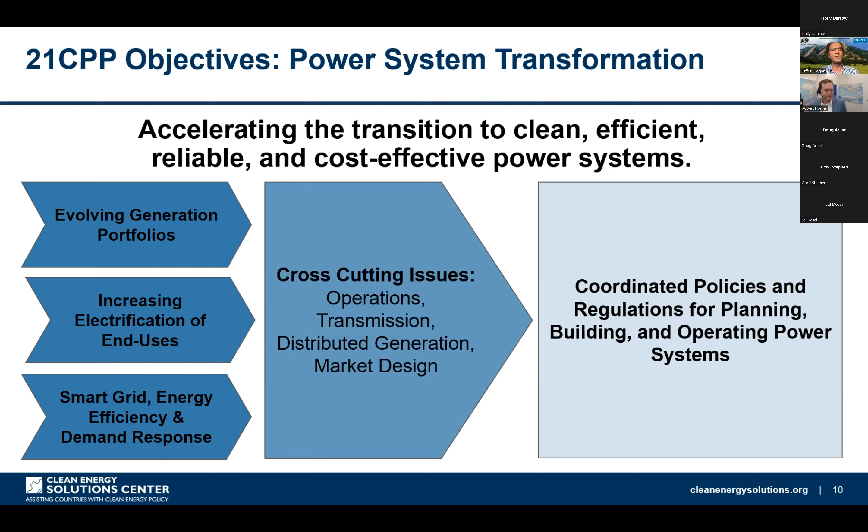So if I could have the next slide, please. Our annual program of work focuses on what we call thought leadership studies and providing technical assistance, either on a bilateral or sometimes regional basis to other countries to help them focus on the specific challenges they're facing as they transition their power sectors.

And we also provide information exchange, capacity building, and on occasion fellowship programs where people can help to build capacity in their technical capabilities. And the next slide.

And the next slide, we're going to take a quick look at a short video, which is now quite old, I could say. It is a video that shows the results of a grid integration study that the 21st Century Power Partnership and many other organizations produced back in, I think it was 2017.

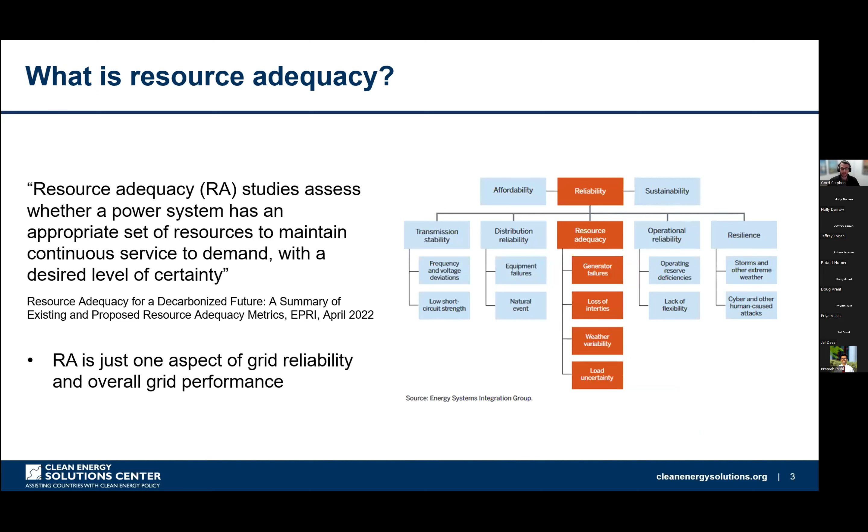As a starting point, it's probably best to lay the groundwork, make sure we're all on the same page in terms of what is actually resource adequacy. What do we mean when we're saying that, and how does that relate to other aspects of power system performance that we care about?

There's lots of different things that you would want out of a power system in terms of designing one, in a future power system that meets different expectations of society. As Jeff alluded to earlier, obviously we want it to be affordable. We want it to be sustainable and in line with decarbonization goals. And we also want it to be reliable.

Within the umbrella of reliability, we have a number of different aspects of power system reliability, and I would argue that resource adequacy is the most foundational of all of those aspects. Resource adequacy, I think this is a good quote from an EPRI report, the way they describe it, is assessing whether a power system has an appropriate set of resources to maintain continuous service to demand with a desired level of certainty.

So it's really about the fundamental supply-demand balance on the power system. Do you have enough electricity available, and are you able to move it to the right places to serve demand everywhere all the time? Of course, we know that's not physically possible to have 100% certainty that you can always serve load everywhere, because there's always going to be events happening that could compromise that capability. But we want to assure that we can do that with a sufficiently high level of confidence, or in other words, there's a sufficiently low level of risk of having some kind of shortfall event.

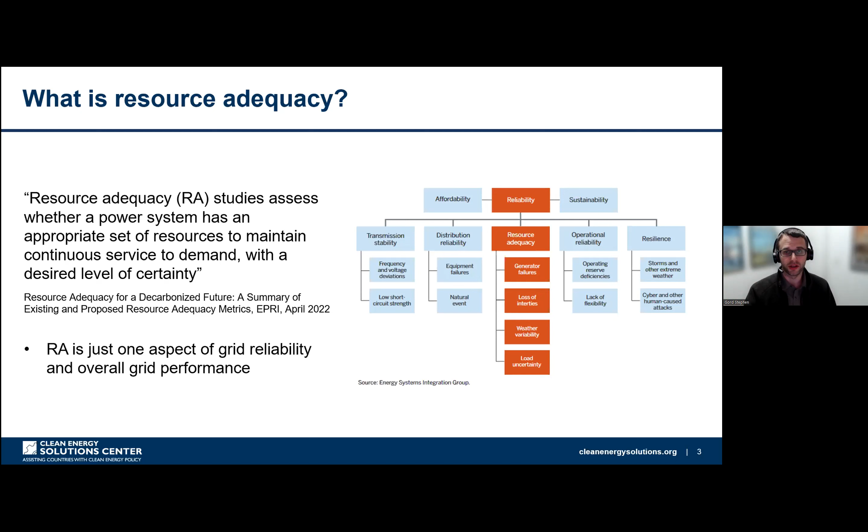So then the next logical question might be, do we need to change how we think about resource adequacy? This is a topic that we've been studying as long as there have been power systems. But under the transition that we're experiencing now in power systems around the world, there really are some things that change some of the underlying assumptions that go into trying to assess whether or not a particular system would be considered resource adequate or not.

Especially historically, this type of analysis has really been focused on risks arising from thermal generating plants. If you have a coal plant, there's some probability that at any given point in time, there's some mechanical issue or failure that happens with that plant that forces the generating unit to be taken offline for repair. While that unit's offline, obviously it's not able to produce electricity and contribute to that supply-demand balance we talked about previously. If you get unlucky enough and enough of these random failures happen all at the same time, you can end up in a situation where your ability to balance supply with demand is compromised because of a lack of supply.

Traditional resource adequacy analysis has really focused on trying to quantify the probability that you end up in that kind of unlucky situation where you have a bunch of these independent failures all occurring at the same time. But in decarbonizing power systems, what we're seeing more and more is the risk of a supply shortfall moving away from that kind of thermal generation driven risk and towards weather driven risk.

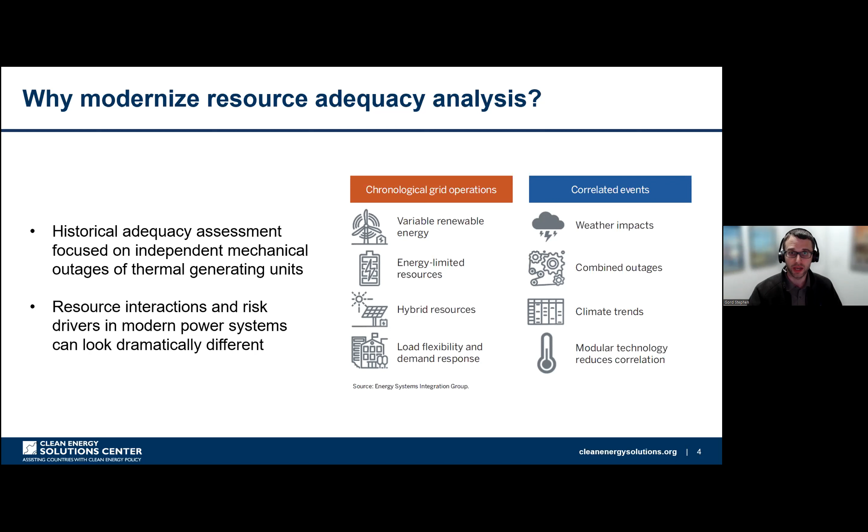Because of all of these considerations, which are in some cases totally different from the historical way that we've thought about resource adequacy and assessed it, that resource adequacy task force that I mentioned earlier proposed 6 fundamental principles of resource adequacy analysis that address these emerging issues. I'm only going to speak to 4 of them today, for the sake of time, but I'm happy to talk through all 6 or take questions on all 6 during the Q&A session. I'm going to talk through these 4 principles in the next 10 minutes or so.

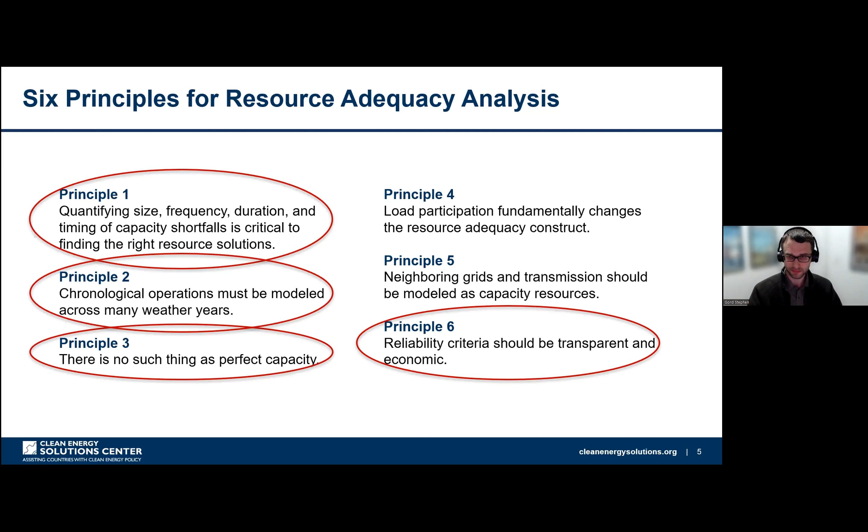I'm going to start with principle 6, which is actually the last principle, but in some ways I think it's the most foundational of them when it comes to deciding how we want to design a system. That's the question of choosing our resource adequacy criteria, basically deciding how much resource adequacy we actually want from our power system. Like I mentioned earlier, we can't get to 100%.

That's not technically possible. But we can, depending on our preferences, spend a lot of money to get really close to 100%, or not. And that choice really comes down to a balance between the benefits and the costs of that additional reliability. In a lot of places, historically, we've kind of thought about resource adequacy criteria as this fixed engineering principle that we need to achieve.

And the point we wanted to make with including this principle in the report is that resource adequacy criteria shouldn't exist in a vacuum. It's all about policy and economic trade-offs between the benefits to society that are delivered by having increased resource adequacy and the costs that society would have to incur in order to achieve those benefits.

So as you develop, or as you choose a resource adequacy standard, and you do these probabilistic studies and quantify the probability of having a shortfall, as you increase the stringent nature of that criteria and expect a more and more reliable system, it's important to keep in mind that that comes with an implicit cost of doing that, and an implicit valuation of what the opportunity cost to society is of failing to supply all that load.

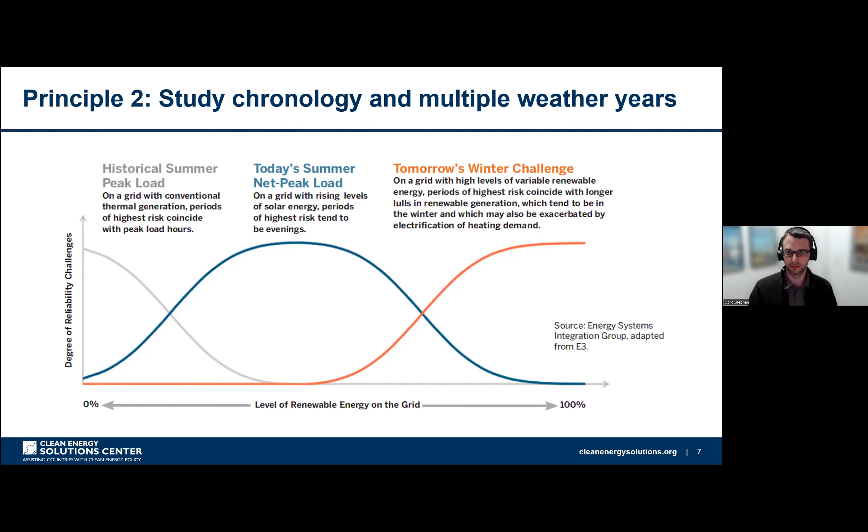The next principle, going not in numerical order here, has to do with identifying the specific risk characteristics your system faces. That can be in terms of the frequency of events, the duration of events, the magnitude of events—how much shortfall you encounter in a resource adequacy deficit—as well as the timing of those events, meaning when in terms of time of year and time of day they happen.

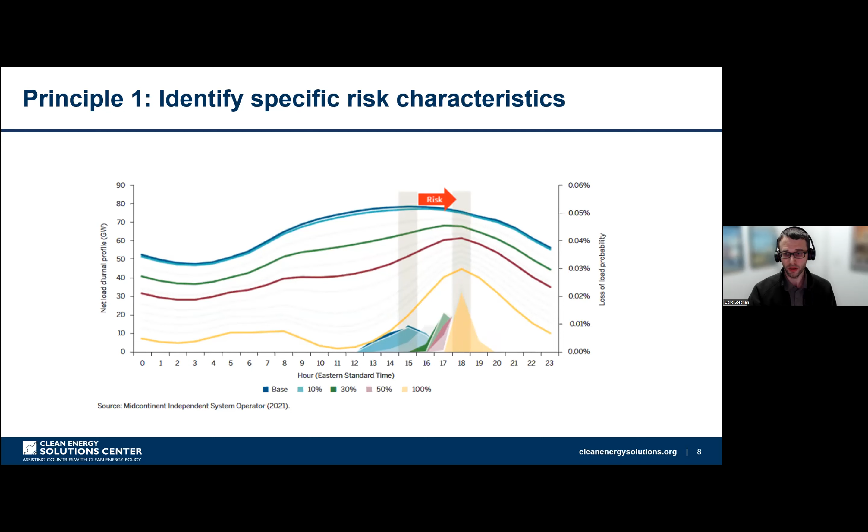And finally, I'll briefly touch on principle 3, which has to do with the fact that there is no such thing as perfect capacity. So I mentioned historically, oftentimes we would think of thermal peaking plants as the solution for improving resource adequacy. These are relatively low capital costs. They may have higher operating costs, but because we're only using them for short periods of time when we have these deficit conditions, that kind of economically made sense.

But even these resources aren't immune to unavailability issues. And in particular, what we've come to understand more clearly in the past few years is that there are lots of other kinds of risk associated with those types of units that we need to account for when we're deciding how resource adequate we want our system to be and which resource mix is required to get there. So in particular here in the US, there have been plenty of examples of situations where times of highest system stress have also aligned with times of low availability from resources that we've historically thought of as always being there and super dependable.

So things like cold waves that drive increased outages in the thermal generation fleet are kind of classical examples we've come to understand as situations where even these so-called firm resources, like a combustion turbine, they're not perfect. There's some increased risk that they're not available during times of need, and we need to make sure we're capturing that in our resource adequacy assessment and in our investment plans when deciding where the appropriate resources are to design an overall resource adequate system.

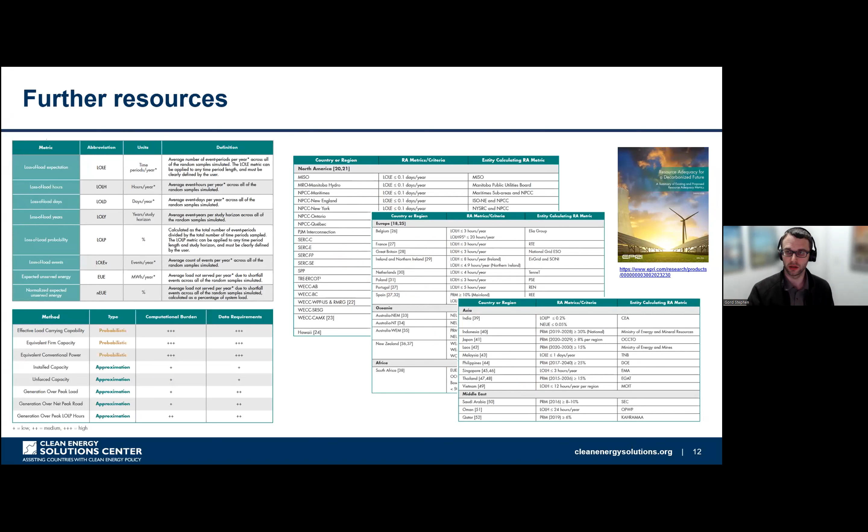And links to all of those reports and documents are included in the presentation. Thank you. So I will wrap up there and hand it over to the next speaker.

Holly, we have a couple of specific questions for Gord now. Should we do them now or should we hold them to the end? We can hold them to the end. All right, Priyam please, the floor is yours.

Yeah, thank you. Can someone confirm whether my screen is visible and whether I am audible? Yeah, looks good. Okay, thank you. Yeah, hi everyone.

I am Priyam Jain. I am currently working as Manager System Studies at National Load Dispatch Center of Grid Controller of India Limited. Today I will be covering the role of flexibilization of conventional power plants to facilitate large-scale renewable integration, and I will be taking the example of the Indian power system for the same.

Today's presentation would cover the following in sequence. First, I will be covering the overview of the Indian power system, including the current generation and capacity mix, and the future roadmap for renewable integration or the clean energy transition in the Indian power system.

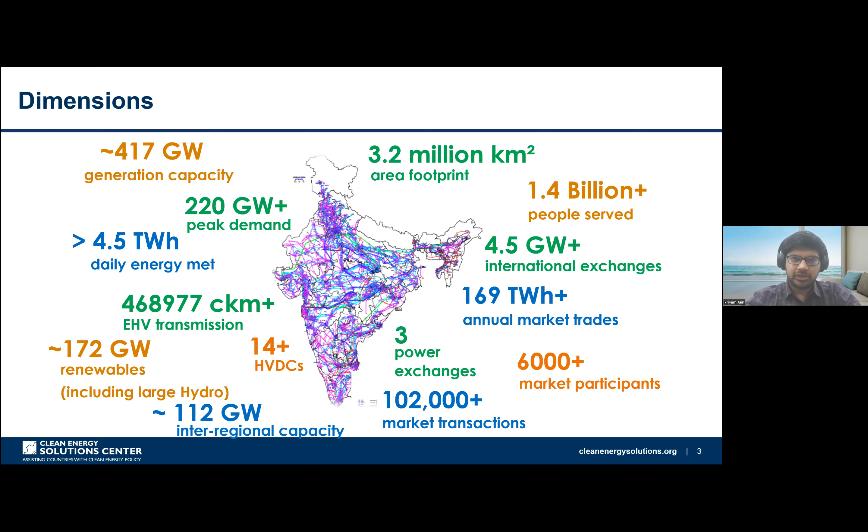So the clean energy transition in India has already started, and the same is also getting reflected in the annual and daily VRE penetration, as well as in the maximum VRE penetration. We can see that the annual wind and solar penetration in energy terms has already touched around 11% in the last financial year, whereas the maximum VRE penetration in daily terms is almost double that, at around 21%, while the maximum instantaneous VRE penetration has been recorded as 32% so far.

And some of the RE-rich states, such as Karnataka, have already touched a maximum instantaneous VRE penetration of more than 100%, which implies that they have met all of the demand through renewable generation sources only.

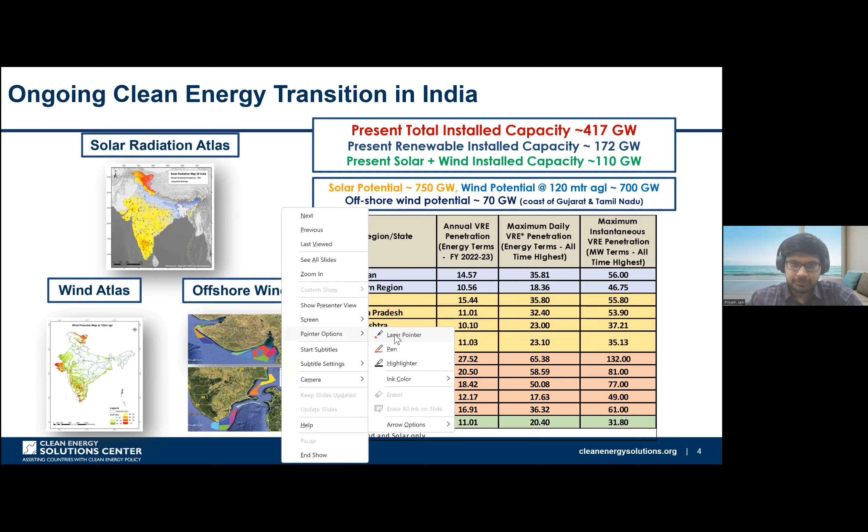The clean energy transition roadmap in the Indian power system has already been notified by the government of India. As per the roadmap, India will integrate 500 gigawatts of renewable, non-fossil capacity by 2030. Most of that will come from solar and wind generation sources, with both combined contributing around 400 gigawatts. Accordingly, the mix of solar and wind generation in 2030 would be around 51%, and these two will be the major sources of the total capacity mix, replacing coal as the most dominant source at present.

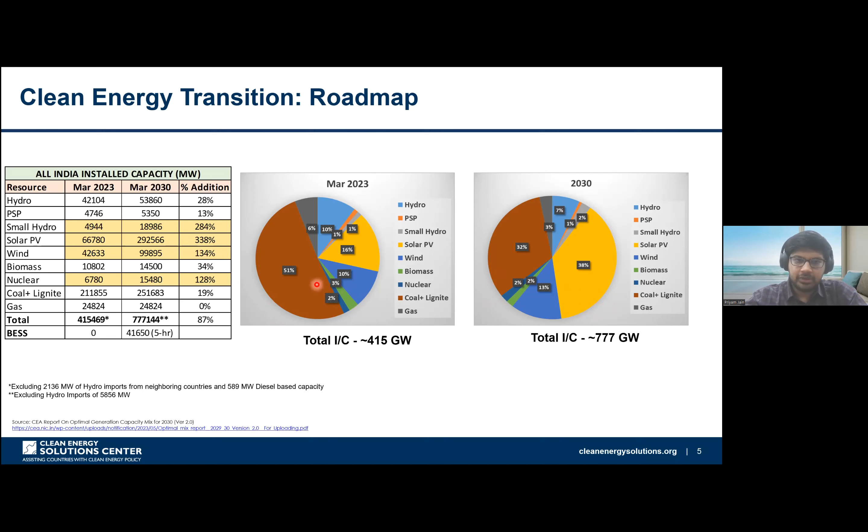In order to facilitate this large scale of renewable generation in the near future, there is a requirement for additional flexible resources in the system. But renewables are not the only reason for this increased demand for flexibility. There has also been an increasing trend in variability on the demand side.

Here we can see the demand trend for the month of February, which is usually the winter period in India. We can see the steep ramp in morning demand during the morning demand hours, and the typical ramp rate is of the order of 250 megawatts per minute, with the same increasing to around 500 megawatts per minute on some special days.

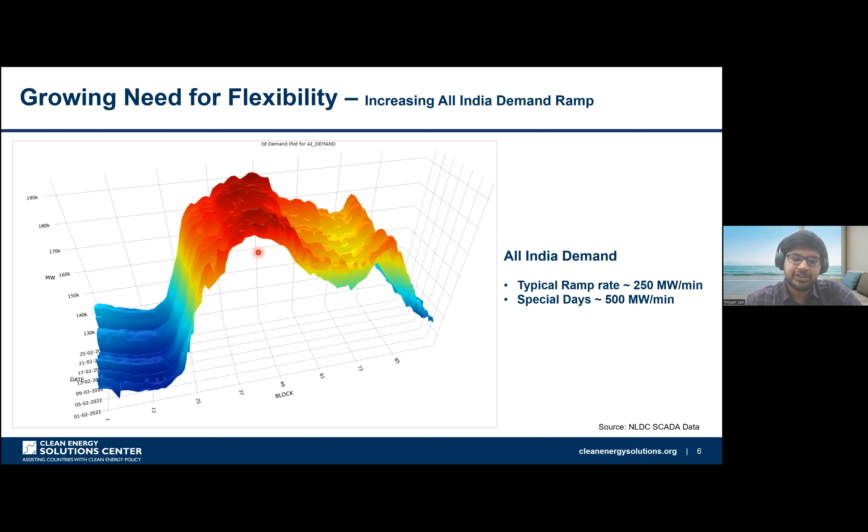The main reason for this increasing variability on the demand side is not only the integration of renewables, but also the disproportionate increase in minimum and maximum demand. Here we can see that the difference between maximum and minimum demand during the last 10 years has increased significantly, and now we see daily load variations of the order of 70 gigawatts.

This has increased the requirement of flexibility on the generation side also, which has been met through additional flexing of the thermal fleet and the hydro generation.

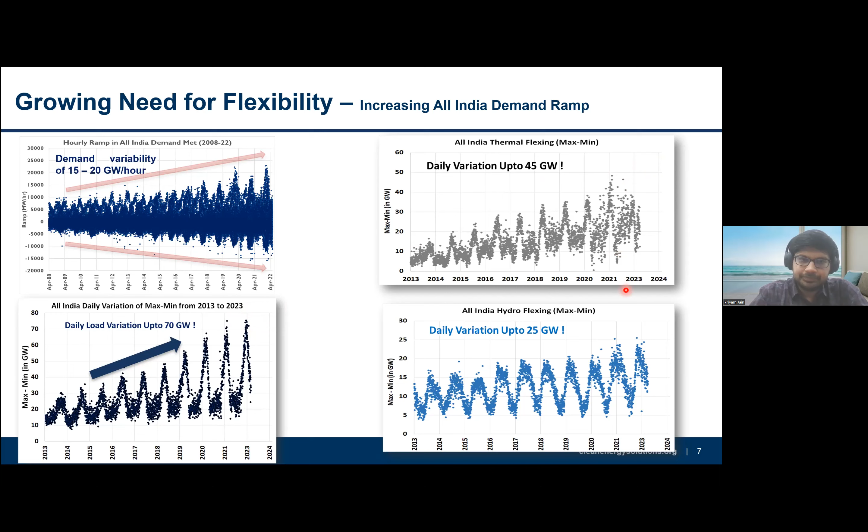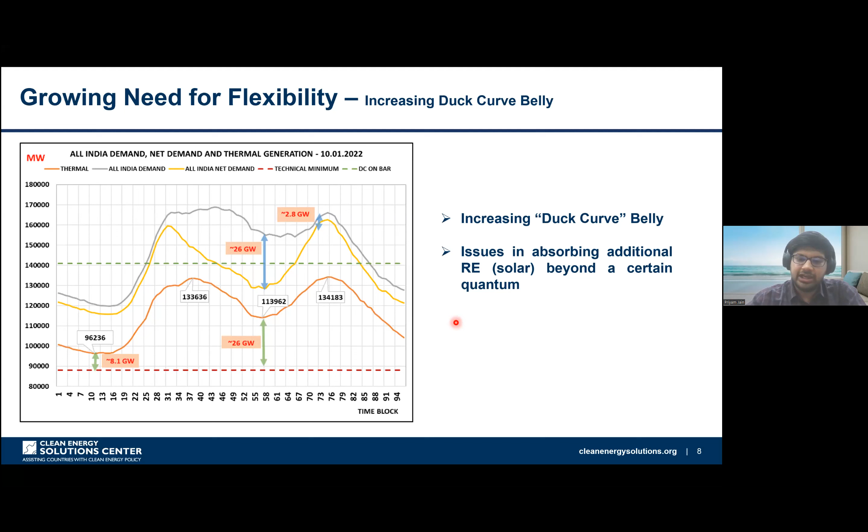So definitely the duck curve belly is increasing, and it requires more flexible generation resources in the system to accommodate the same. Now, what all are the major flexibility providers in any power system?

Gas and hydro-based generation are the most flexible resources, and they have been providing the necessary flexibility in the Indian power system also, as can be seen from the gas generation trend for a typical day, where the peaking capability is being provided by the gas generation.

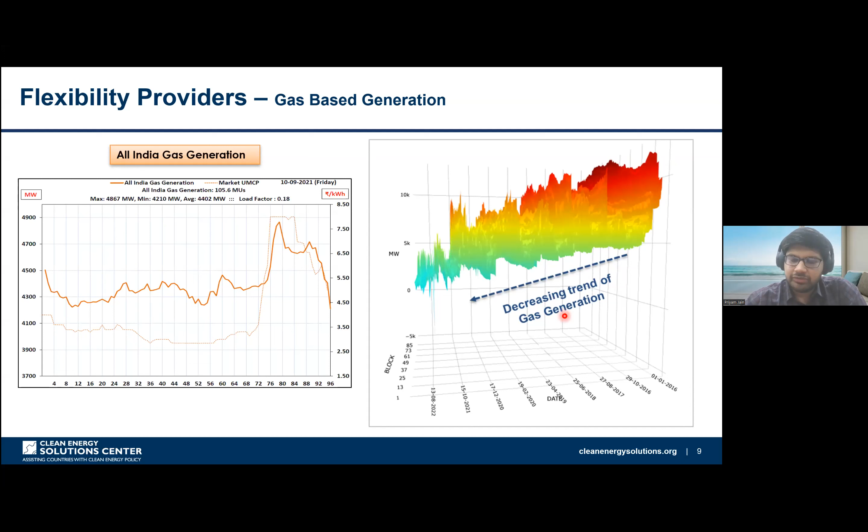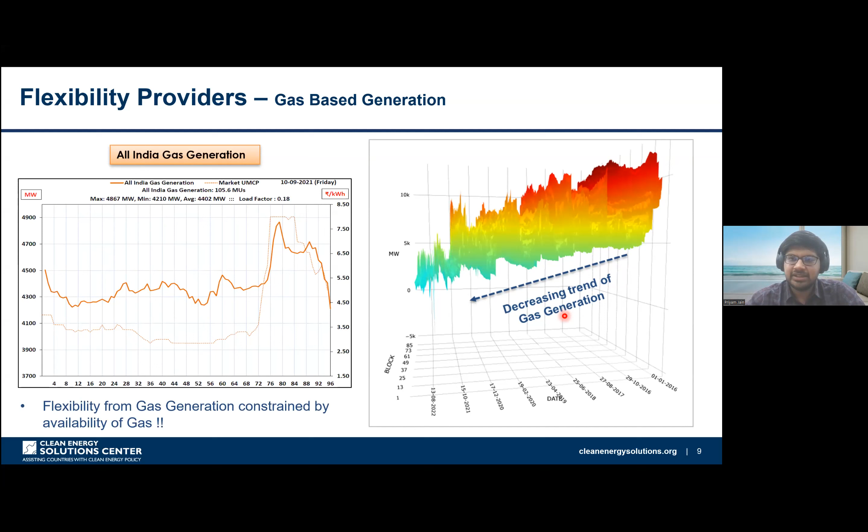However, at the same time, we can see that the trend of gas generation has been on a declining trend because of the availability of domestic gas and the high gas prices globally. Therefore, the flexibility provided by gas generation sources is constrained by the availability of domestic gas, so the same cannot be relied on for facilitating large scale renewable generation as of now.

Similarly, hydro has also been the most effective flexibility provider so far in the Indian power system, and you can see that the scheduling of hydro is carried out in such a way that it provides the necessary peaking capability during the morning and evening peak demand hours. However, the flexibility provided by hydro generation sources is also limited, as hydro generation is quite seasonal—for run-of-the-river plants, the flexibility provided by them depends on the hydro inflows. Because of this seasonality, the flexibility provided by hydro generation is also quite seasonal.

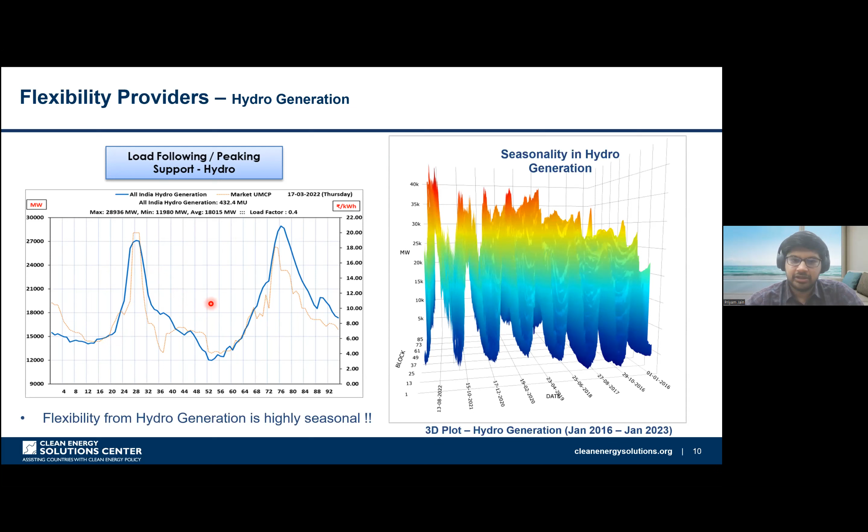It is highly seasonal. So the responsibility of providing the necessary flexibility then comes to coal-fired generation, which also is the major source of generation in the Indian power system. It has been providing the necessary flexibility over the years, as can be seen that the hourly ramp of the all-India thermal generation has increased quite significantly during the last 10 years.

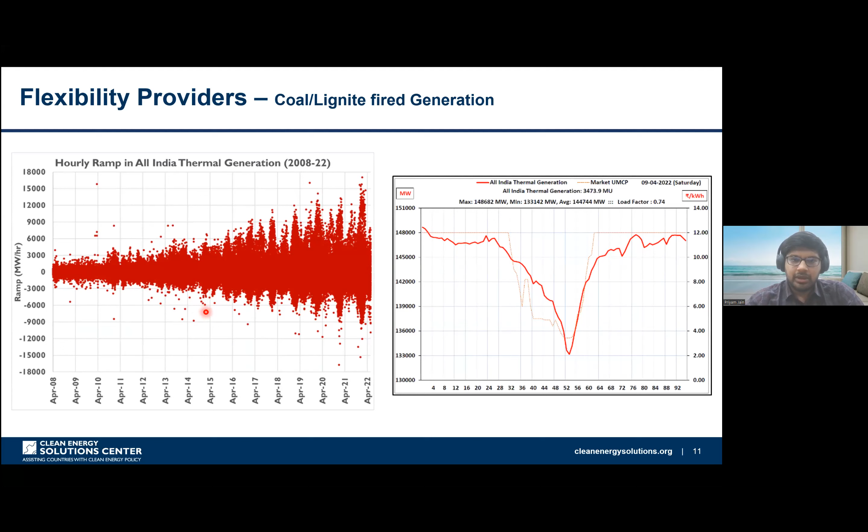Along with harnessing flexibility from generation sources, the load side flexibility is also being harnessed. This curve shows the time of occurrence of maximum and minimum demand in the Indian power system over the last 12 years. Historically, the maximum demand used to occur during evening peak hours. Now, in recent years, the occurrence of maximum demand has shifted to afternoon hours due to the availability of cheaper solar generation during this period. This has been made effective by shifting agricultural loads from the evening peak demand hours to the afternoon hours.

This has, in a way, provided the requisite flexibility to some extent by reducing the quantum of thermal generation that needs to be backed down during the afternoon hours. Secondly, by shifting some of the evening peak demand to afternoon hours, it reduces the ramping requirement during the non-solar hours.

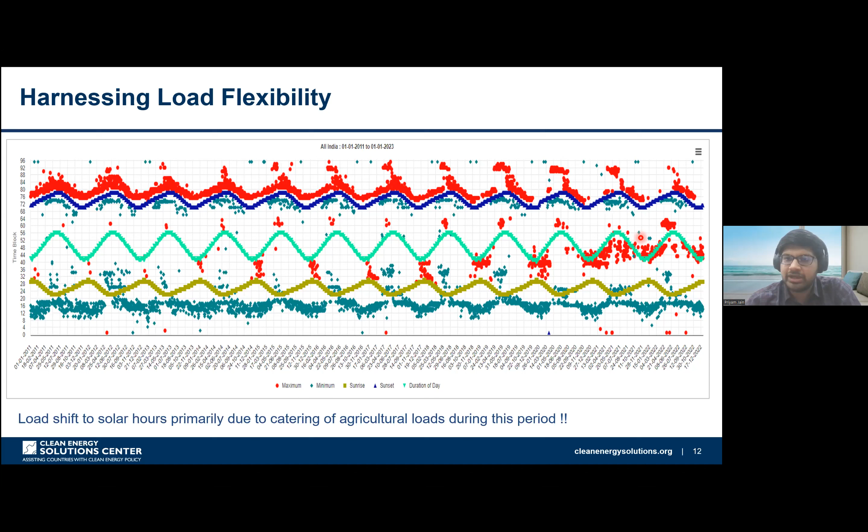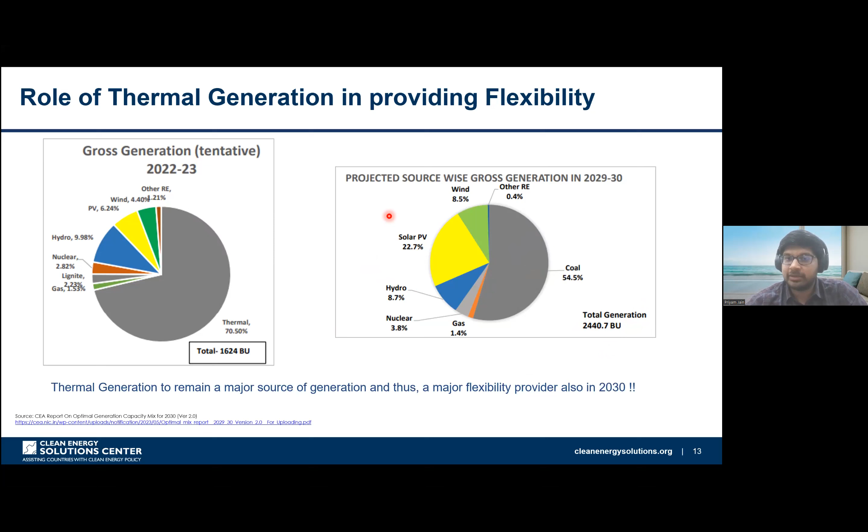As the flexibility provided by gas and hydro generation sources is highly dependent on the availability of domestic gas and seasonality, thermal generation has a huge role to play in integration of renewables in the Indian power system. It is currently the major source of generation, contributing around 71% of total annual generation. It is also projected to remain a major source in 2030, contributing around 55% of total annual generation, though there will be huge capacity addition of solar and wind in that timeframe. It will still be one of the most dominant generation sources, so it's imperative that the flexibility provided by the huge thermal fleet is properly harnessed.

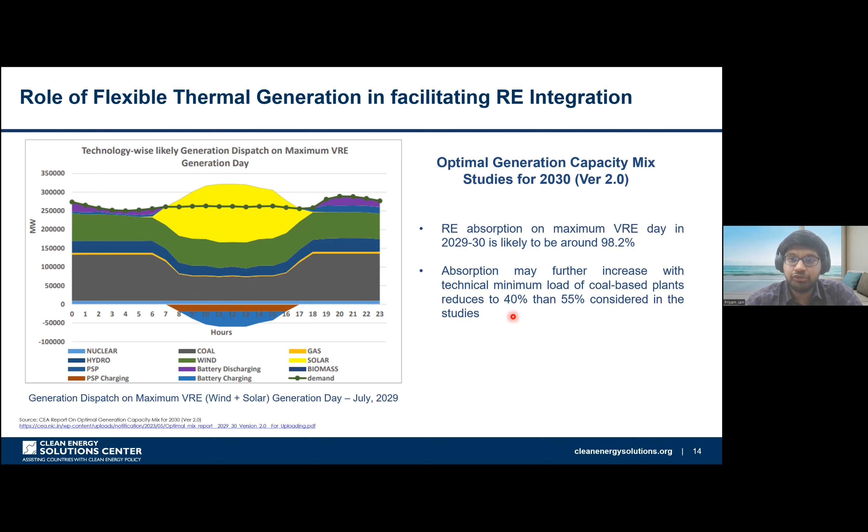Optimal generation capacity mix studies have been carried out for the year 2030, bringing out the optimal capacity and generation dispatch for that year. It has been observed that during the maximum VRE penetration day, the system is not able to absorb the full RE capacity, with curtailment expected of around 1.8%, considering the technical minimum level of the thermal fleet as 55%. However, if we reduce this to 40%, the curtailment during the maximum VRE day reduces significantly.

A similar exercise has been carried out for the whole year, showing the percentage VRE absorption for the year. The RE absorption is likely to decrease to as low as 95% on some high RE days, due to the inflexibility constraint posed by thermal generators. The total RE curtailment is around 0.78%, considering the minimum power level of the thermal fleet as 55%. However, if we reduce this to 40%, the curtailment reduces to 0.25% from 0.78%. So there are significant benefits from deriving flexibility from thermal generators, and various key initiatives have already been taken in this regard.

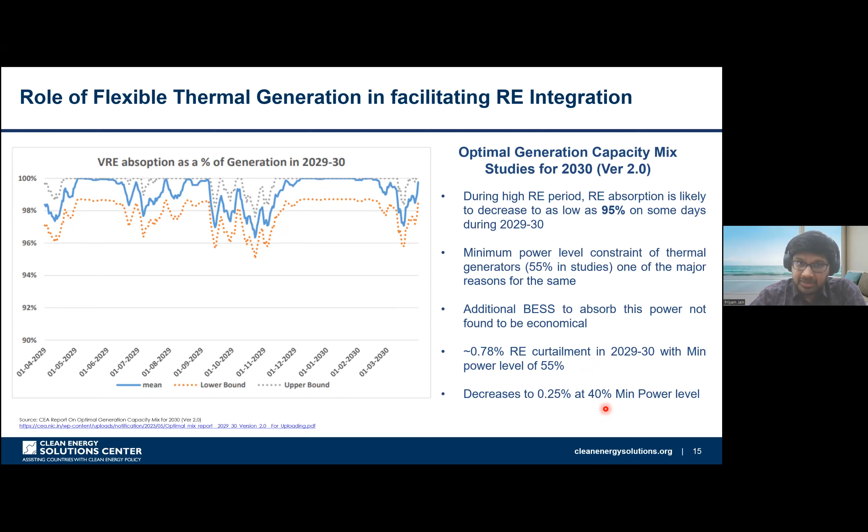The importance of flexibility that can be provided by coal-fired units has been duly recognized by regulators and policymakers. The first major initiative brought down the technical minimum level from 70% to 55% for all central generating stations.

It also incentivized operation of thermal plants at lower operational levels by providing compensation for increase in heat rate at lower operational levels, increase in auxiliary energy consumption at lower operational levels, and compensation for start-up fuel cost for over and above 7 start-stops in a particular year.

Then in 2019, in the terms and conditions of tariff regulations for thermal plants, ramping capability beyond the threshold of 1% was incentivized by providing 0.25% additional return on equity for every 1% increase in ramping capability, with a similar provision for penalizing through return on equity in case of failure to provide the specified 1% ramp limit.

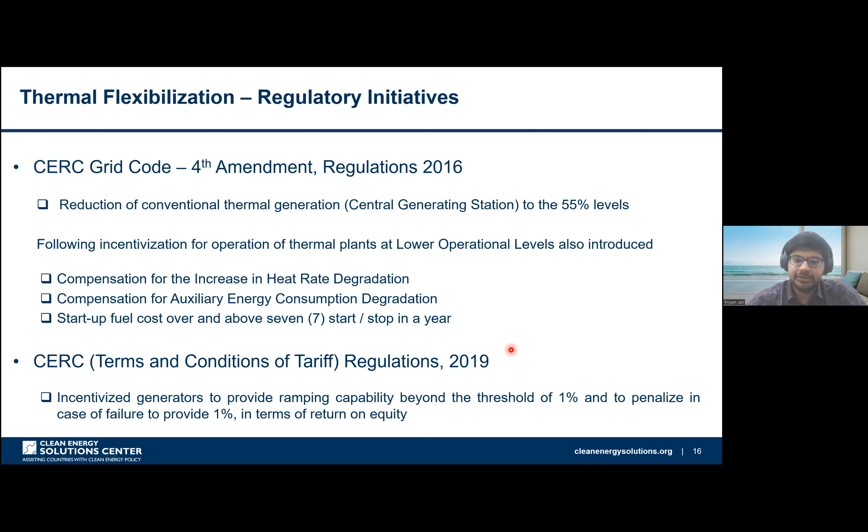Recently, in 2023, the Central Electricity Authority brought out a key regulation on flexible operation of coal-based thermal power plants, specifying that the minimum power level of all thermal generating units shall be 40%. All units shall be capable of operating at this minimum power level, for new units as well as old units.

For implementation in older units, a phasing plan has also been prepared, and all thermal power units will be able to operate at this minimum power level by 2030. Similarly, all thermal generators have been mandated to provide ramping capability in the range of 1 to 3%.

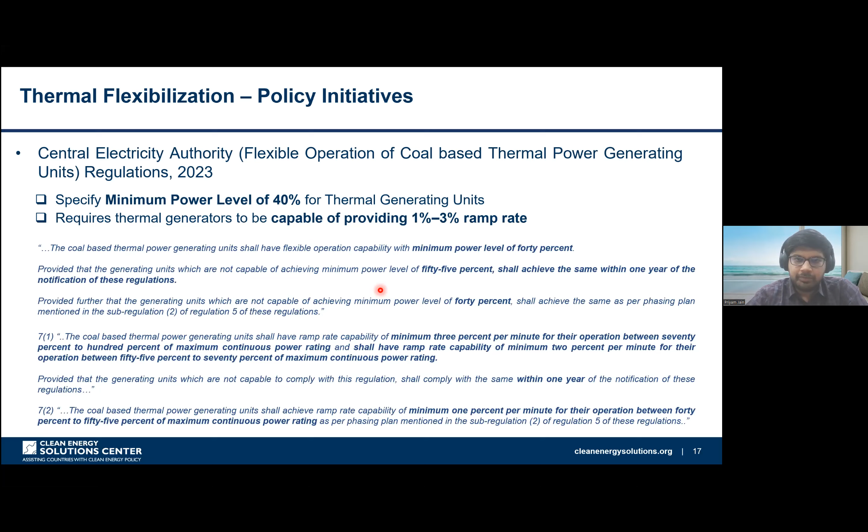So, as I mentioned, a draft phasing plan for implementation of this 40% technical minimum level has been prepared. In the first phase, which will start from July 2024, before that a pilot phase will be conducted where already 11 units of central, state, and private sector have been selected. This pilot phase will be implemented over 6 months, and the learnings will be compiled and used in the subsequent phases.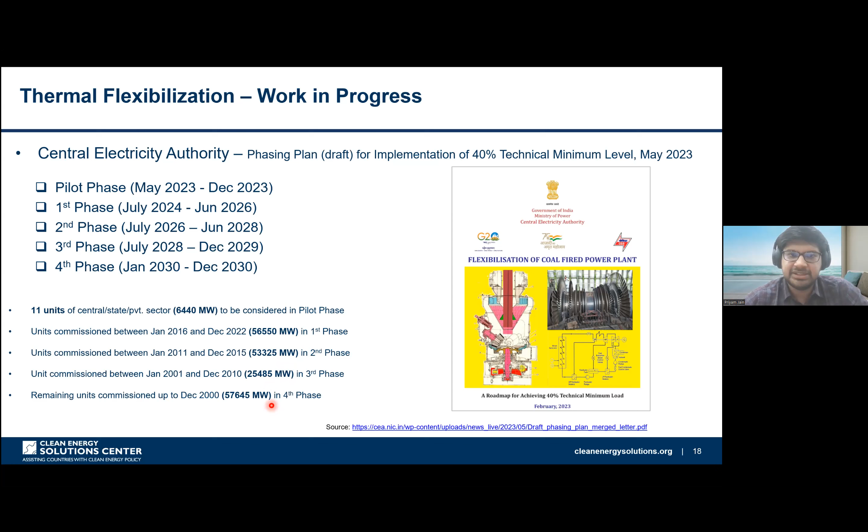The first phase will start from July 2024, and over the next 2 years, all units commissioned between January 2016 and December 2022, totaling around 56 gigawatts, will be considered for implementation of measures to achieve this 40% technical minimum level. Similarly, in phase 2, capacity of around 53 gigawatts will be taken up. In phase 3, around 25 gigawatts. And in the last phase, around 58 gigawatts. So this is the phasing plan for implementation of the 40% technical minimum level across around 200 gigawatts of coal-fired capacity currently present in the Indian power system.

So the major action points for harnessing flexibility from the thermal fleet include timely implementation of this 40% technical minimum level as per the phasing plan, incentivizing generators for the incremental cost from operating thermal units at low loads, and exploring the possibility of 2-shift operation of existing thermal units. Various pilot projects on this are already going on in India, but an action plan to implement this across the whole thermal fleet needs to be prepared and implemented.

And lastly, capacity building and knowledge dissemination across all power sector stakeholders needs to be carried out, because at present utilities and generating stations are quite reluctant regarding the operation of thermal units at low load levels. So this is also an area that needs to be emphasized in the near future for the flexibilization of thermal units. So, that's it from my side.